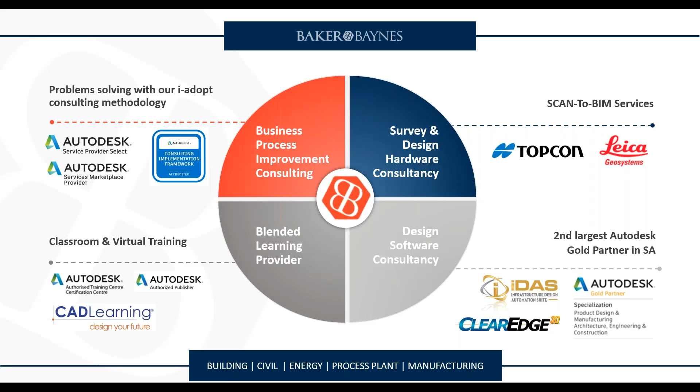I'm going to introduce you to my colleague now, Heilandi Burger, the process plant and manufacturing technical specialist at Baker Baynes. She's quite passionate about the design side as well as manufacturing, holds a mechanical engineering diploma, and has over 10 years of industry experience in the drawing office. She's passionate about data management as well as music, and is a bass guitarist. So without further ado, I'm going to welcome Heilandi Burger, who's going to give us some great insight into the presentation today. Thank you very much.

Thanks, Daneel. A few of our customers told me in the last few months they wish we could meet in person and have a wine and dine like in the past. That would have been nice, but this is at least an alternative where we can still meet and discuss the future with technology.

First of all, I'm going to start off with a poll question. How familiar are you with Baker Baynes and all of our offerings? I'll give about a minute. Just answer for me: you're not familiar with us at all, you're somewhat familiar, or you've been a client for years and know everything about Baker Baynes and what we've got to offer.

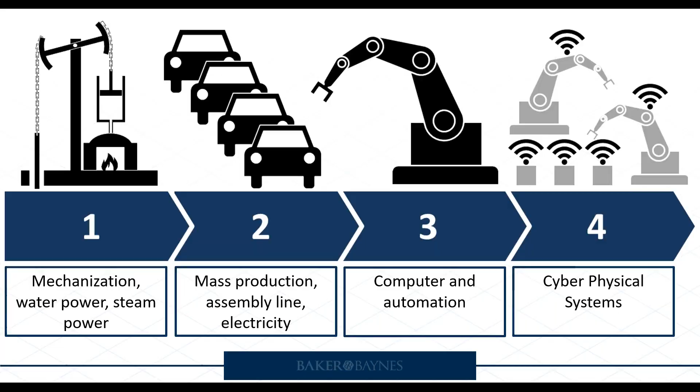Before the first Industrial Revolution, most industrial work was done manually or aided with animals. The first Industrial Revolution started in the 18th century. During this time, manual tasks were replaced by the use of steam engines and other machines. Agriculture and the textile industry benefited the most from the first Industrial Revolution.

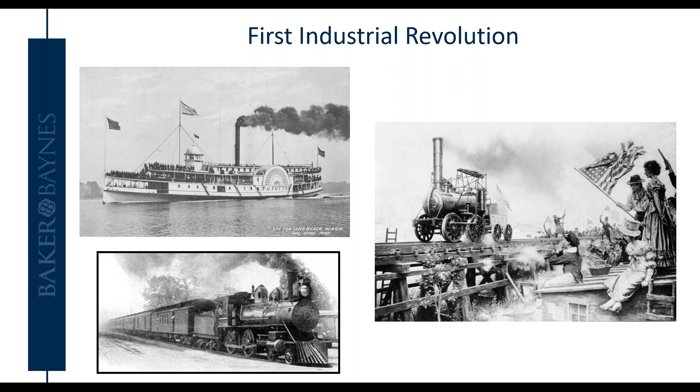The second Industrial Revolution started with the use of steel and electricity inside factories. It started at the end of the 19th century and the early days of the 20th century. During this era, factories were electrified. As a result, productivity increased and mass manufacturing concepts came into the picture. Development of railway networks also enabled the transportation of goods from one place to another faster.

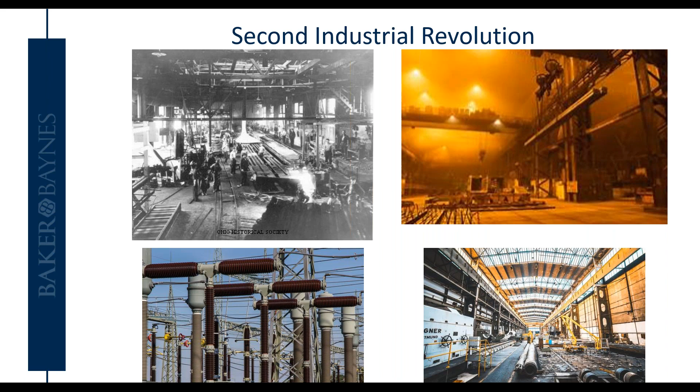So now we are living in the era of the fourth Industrial Revolution, or Industry 4.0. In advanced factories, automated machines and robots are aiding the human workforce to do manufacturing activities. But this is just the start. Industry 4.0 will take manufacturing to a new level by introducing the concept of smart factories, producing smart products using flexible mass manufacturing technologies. Inside smart, fully automated factories, machines will operate independently.

So how does Industry 4.0 work? Cyber physical systems are key for Industry 4.0. Smart factories utilize the Internet of Things to connect smart machines, material, and processes to the Internet. These machines send real-time data to the cloud.

In the cloud, this data is processed using machine learning algorithms. Processed data is sent back to the smart machine, where a modern control system controls the machines and robots to manufacture parts automatically. In this way, high productivity can be achieved without having any impact on product quality. The ultimate goal of smart factories, or Industry 4.0, is to manufacture products without human intervention.

The World Economic Forum estimated that by 2020, more than 50 billion things, ranging from cranes to coffee machines, will be connected to the Internet. Now, 2020 was last year already. Just think about it, 50 billion things connected to the Internet.

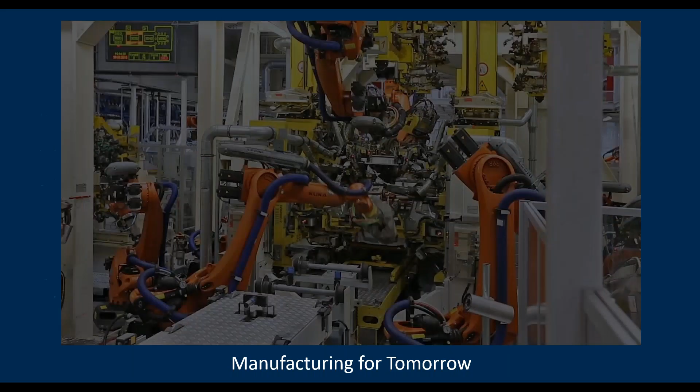So products become assets that can be connected to the Internet, which means they can be remotely monitored. This can help companies better understand how assets are used, predict when they need maintenance, and sharpen total cost of ownership models. By knowing what faults can be avoided or their impact minimized, and with a better understanding of risk and financial exposure, companies can establish service-based contracts with service-level agreements based on reliable data.

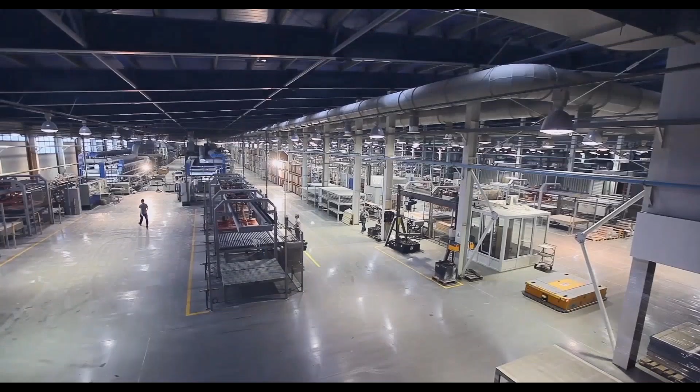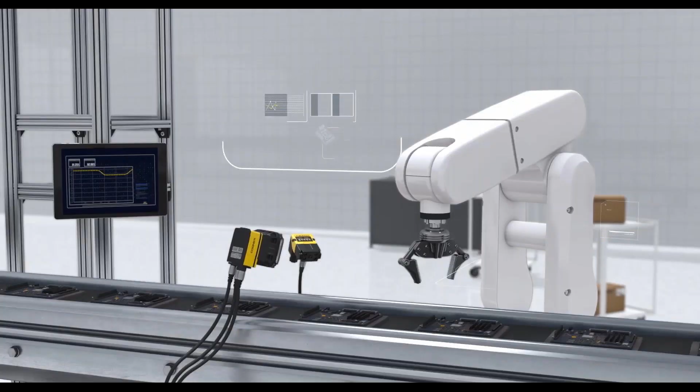What will the manufacturing of tomorrow look like? Industrial parts are becoming smaller. Products get to market with less waste, faster, and on time. Even the most manual processes are turning towards automation. Innovations in machine vision, deep learning, and robotics are revolutionizing production lines and supply chains.

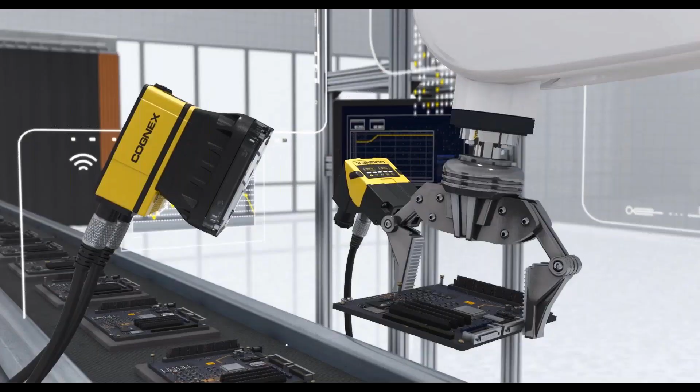Our machines now produce vast amounts of big data accessible via the cloud. As machines and the information they produce become linked, new cyber-physical systems will spark a modern-day industrial revolution. This is Industry 4.0. In Industry 4.0, smart machines learn from their environments and take corrective actions to optimize production. These machines work independently of a central controller, collaborating and communicating with other devices.

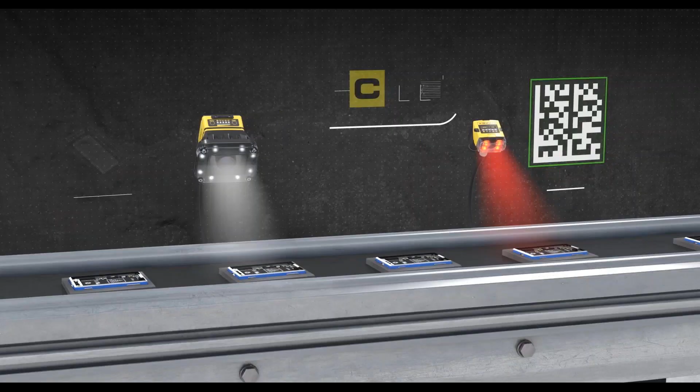Industry 4.0 factories produce new organizational intelligence, which spreads across facilities and is accessible anywhere. The result: nothing short of total transformation of production lines and business performance. Machine vision will be at the heart of this new manufacturing paradigm.

Industry 4.0 signifies the promise of a new industrial revolution, one that marries advanced production and operations techniques with smart digital technology to create a digital enterprise that would not only be interconnected and autonomous, but could communicate, analyze, and use data to drive further intelligence back in the physical world. It represents the ways in which smart connected technology would become embedded within organizations, people, and assets, and is marked by the emergence of capabilities such as robotics, analytics, artificial intelligence and cognitive technologies, nanotechnology, quantum computing, wearables, the Internet of Things, additive manufacturing, and advanced materials.

While its roots are in manufacturing, Industry 4.0 is about more than simply production. Smart connected technologies can transform how parts and products are designed, made, used, and maintained. They can also transform organizations themselves, how they make sense of information and act upon it to achieve operational excellence, and continually improve the consumer or partner experience. In short, Industry 4.0 is ushering in a digital reality that may alter the rules of production, operations, workforce, and even society.

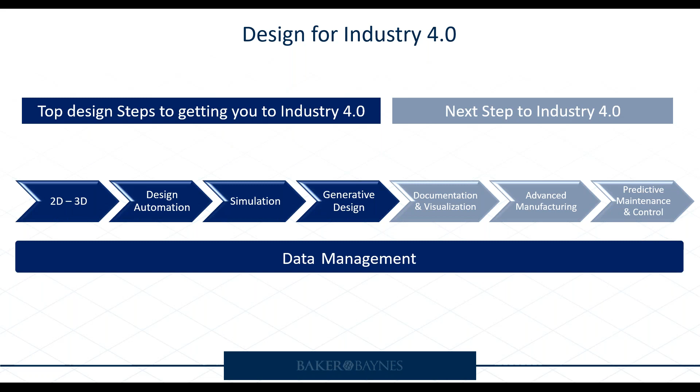Data management will always be part of any of the steps that you take to become better as a company. And we will keep that underlying in every webinar that we have and every event we've got. We will keep talking about it because it's really, really important to all of us.

So the four steps we're going to introduce for the next few months: 2D to 3D, as already discussed, design automation, simulation, generative design, and then the foundation, data management.

We already started with changing, updating, or redesigning your 2D to 3D designs, and we will talk about this a bit later with one of our customers who are currently going through this process.

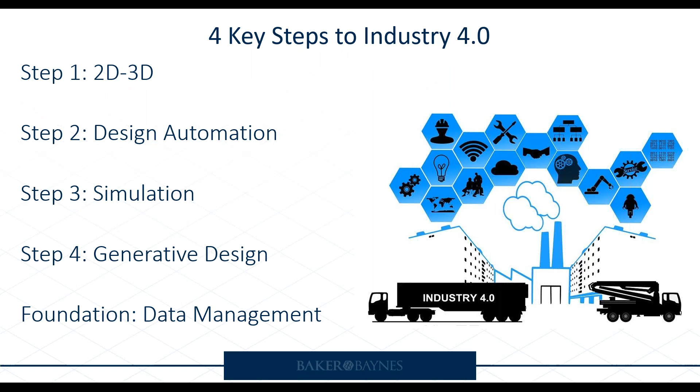So data management, from step 1 until infinity. Why do we need this? Well, because this is the problem we've all built.

Data is all over, in different departments, in different file formats that get sent around. How many emails do you get in a day? And how many of them have an attachment? Something that you have to go in and look at.

Every company is like this, with processes that need to be improved. This is what we are finding. The flow of information never stops, and there's always data somewhere. Data takes different forms. Sometimes it's a file, sometimes it transcends a file and is something else.

When you have a design in a variety of CAD applications, there's only really one good place for it, and that is a PDM system. At Autodesk, we call that Vault.

Vault data management comes with a variety of different Autodesk products, like Inventor Standalone and the Product Design and Manufacturing Collection. If you use these tools, you already have Vault Basic. There are other flavors of Vault, such as Vault Professional, and we'll discuss it a bit later.

Vault is there, it centralizes your data, and it is the place to find up-to-date information. In short, if it's not in Vault, what are you even doing with it? Where are you saving it?

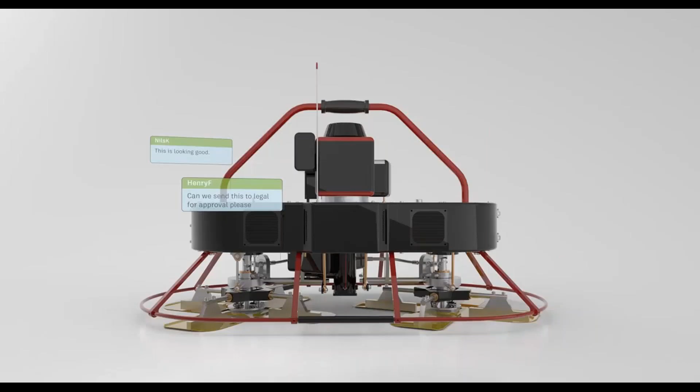And of course, no company will be able to perform optimally if their data management is a mess. With Vault, we can rectify that. You can just look at this short video.

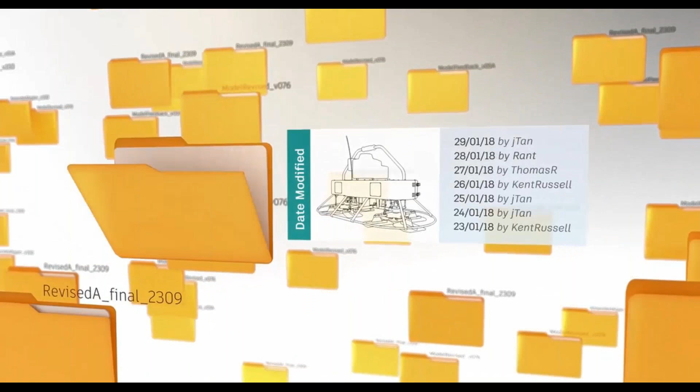Sometimes it's not the project holding you back, it's everything else. It's searching through disorganized files. It's opening a file only to find it's been overwritten by someone else. It's chasing down signatures or change orders. Working with cumbersome spreadsheets. Designing takes a lot of work that has nothing to do with designing. So how can we cut through the chaos and get back to the real work?

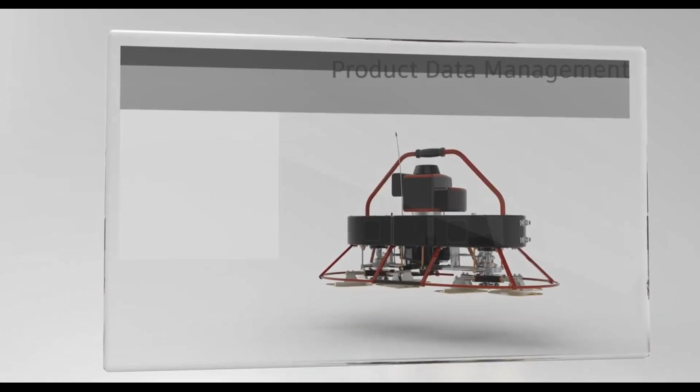Vault is a product data management solution designed just for engineers. It directly integrates with your CAD environment, so you can find what you need quickly, access and configure files easily, and prevent scrap and rework.

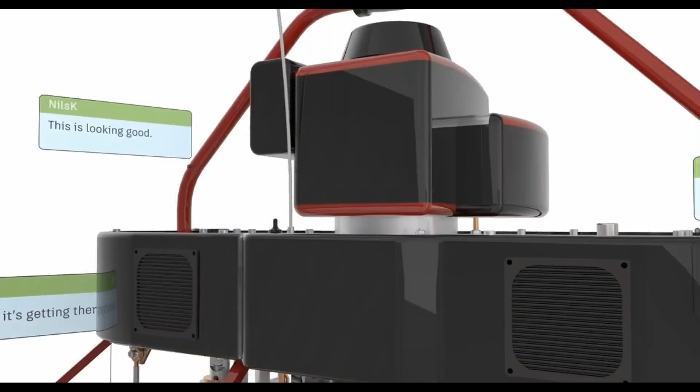But it's more than CAD file management. It allows you to share views with others. It streamlines communication, versioning, and organization. In short, it equips engineers to work and collaborate more efficiently, which helps you deliver better products faster and at lower cost.

Autodesk Vault has a product family. It's a stack of products, and each offering has incremental functionality over the previous product. While Autodesk Vault Basic is included with many Autodesk design applications, additional functionality is available based on your needs. The following products are part of the Autodesk Vault family.

You can have Vault Basic. With Vault Basic, you can do basic file management. You have a single workgroup, fast searching, Autodesk CAD integrations, and design reuse tools.

With Vault Workgroup, you will have file revision control and lifecycles, utilities for batch plotting, automatic file naming, a standalone client for non-CAD users, file and folder security, reporting, and server-based DWF publishing.

With Vault Professional, you will get all the functionality of Vault Basic plus Vault Workgroup. On top of that, custom objects, multi-site replication, a search, view, and print web client, advanced backup and Windows authentication, bill of materials management, engineering change management, and it coexists with enterprise business systems.

Just a reminder, Vault comes in about 40 different applications. That means in CAD we can check in, check out, log in, log out, undo checkout, and with some of the other tools and with Vault Professional, we can actually change the lifecycle states, categorize, and run reports on a vaulted item right from inside the CAD tool. So it runs inside of CAD.

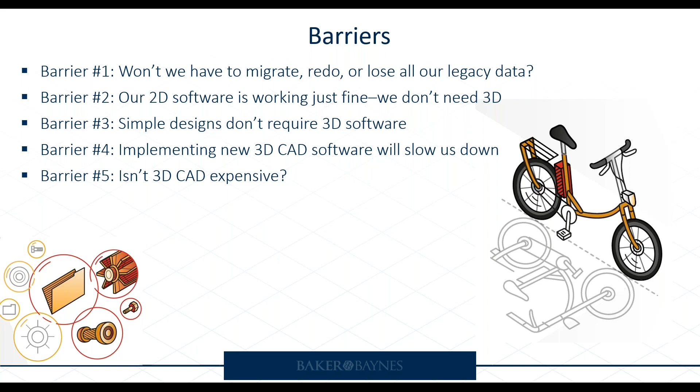Number 5: isn't 3D CAD expensive? The cost of 3D CAD will be returned over and over again through efficiency gains, reduced waste, improvement of product quality, and the value that you offer to your customers.

In the next video, you will see how a part that's drawn in 2D is used to update an assembly in Inventor to 3D. For years, designers have been taking advantage of the layout capabilities of 2D tools such as AutoCAD.

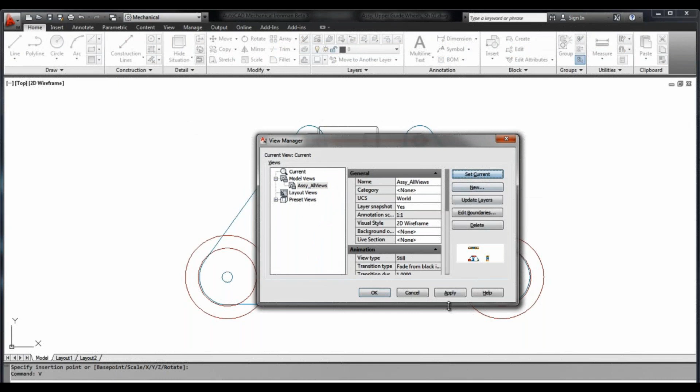Here we see a fairly standard 2D orthographic drawing layout. Autodesk Product Design Suite extends the usefulness of these drawings by allowing users to import selected elements directly into Inventor sketches and leverage existing 2D documentation, thus simplifying the creation of the 3D design.

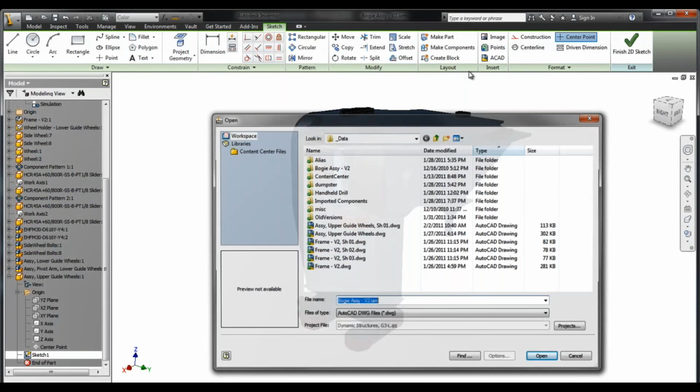To utilize this 2D AutoCAD drawing in the Inventor sketch environment, select the ACAD command from the Insert commands on the Sketch tab. From the Open dialog box, select the AutoCAD file to use as an Inventor sketch.

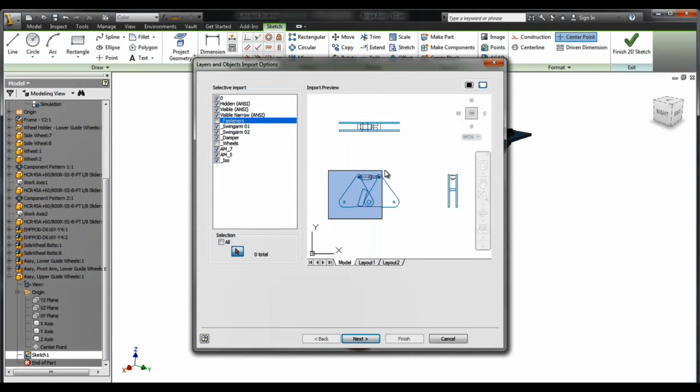This opens the Layers and Objects Import Options dialog box, where you will select specific entities that will be used as sketch geometry. From here, layers may be enabled and disabled, and options regarding the configuration of those entities to be placed in the Inventor sketch, such as default units, disposition of constraints, and blocks, are set.

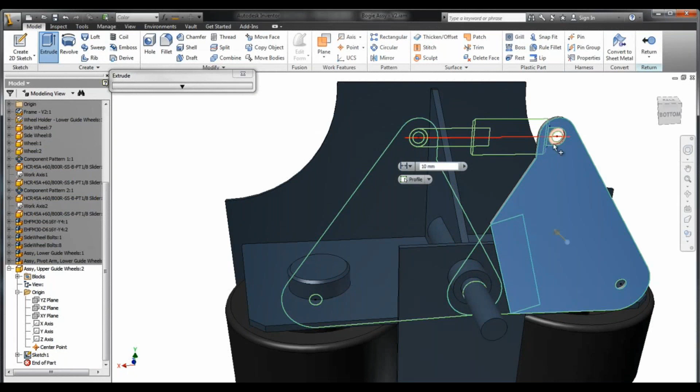After this geometry is placed on the active sketch plane, it may need to be positioned relative to the current sketch origin, depending on values contained in the original AutoCAD drawing. From this point forward, this sketch geometry will behave like all other sketch geometry. Regions within the sketch may be selected and used for extrusions, revolves, etc.

Inventor's new mini toolbar facilitates the setting of properties for this new extrusion feature. In this example, multi-body part modeling techniques are employed to facilitate the design of a weldment assembly within a single part, utilizing a single sketch.

Okay, so next up, we're going to discuss a little bit of design automation. Design automation enables you to capture and reuse engineering knowledge and intent. Automation not only helps reduce errors and time spent on tedious, repetitive modeling tasks, but it can also be scaled to streamline downstream development processes. Design automation can mature from automating basic parameters to full-scale product configuration. Setup can be as simple or as complex as your current needs demand.

We can show you how iLogic technology found in Autodesk Inventor enables engineers to easily utilize rule-based design without complex coding.

Sheet metal parts and welded frames often include standard features that require simple yet tedious modeling. Eliminate busy work by automating the creation of typical product features. Manually modifying models to meet customer specs can drain engineering resources. Define parameters to create your 3D model and easily set rules to drive a custom product configurator.

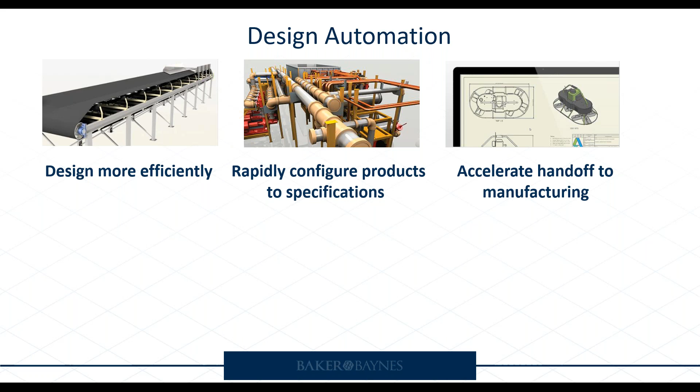Extend your automation beyond engineering with simple-to-code tools that capture and execute standard processes for the creation of drawings, toolpaths, and other documentation. Let's look at how design automation saves you time and gives you back the reason for becoming a designer in the first place.

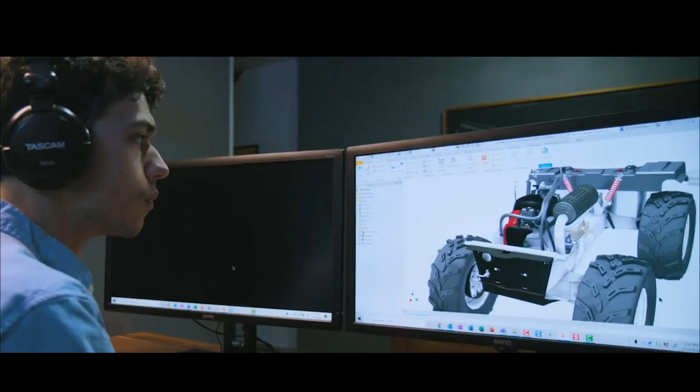What was it that inspired you to become an engineer? Was it solving complex problems or bringing new designs to life? Now compare that to how you actually spend most of your time. How do we deal with all those routine tasks that interrupt us when they too must get done?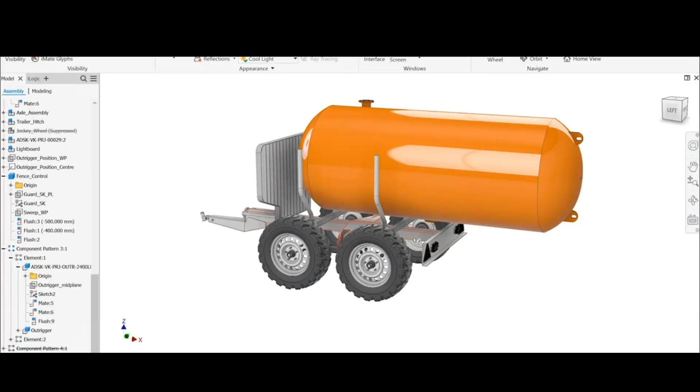Your factory floor uses automation. Why not bring a little bit of that into the engineering offices?

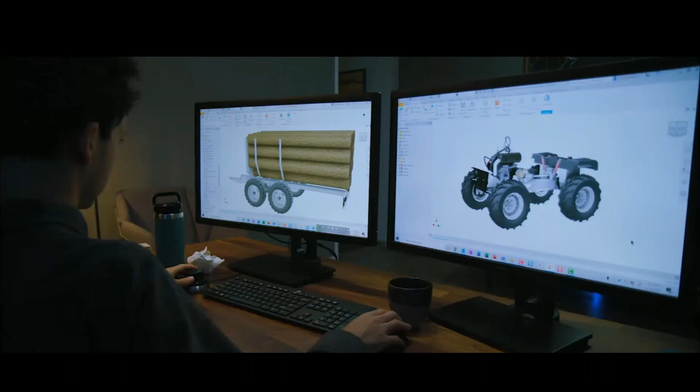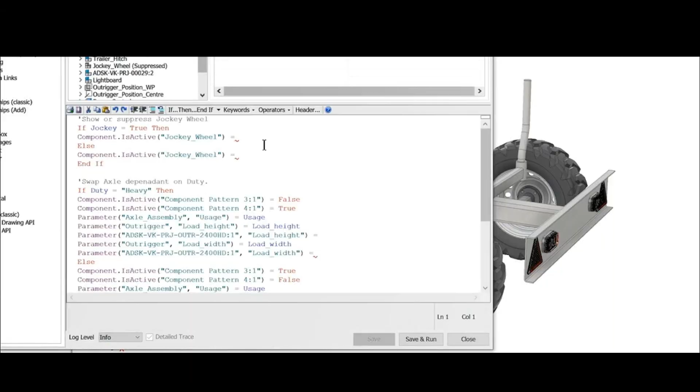With iLogic technology, design automation saves you time by reusing engineering knowledge and intent within your CAD software. We created iLogic technology for use inside Autodesk Inventor. There are no expensive third-party add-ons. It's all included. Using parameters that you've defined in your model and a vast library of code snippets, you can create rules intuitively.

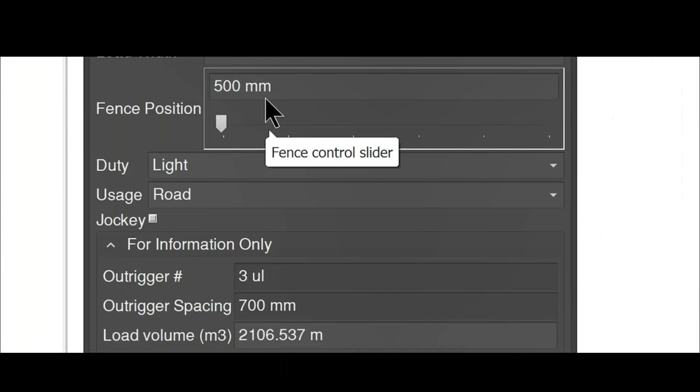So that next time you need a design generated, just input the parameters and the work is done for you. It's that simple.

To model an impeller manually took a couple of days previously. With the iLogic program, it takes about 15 minutes. If we're modeling hundreds of impellers a year, to create this program is absolutely worth it.

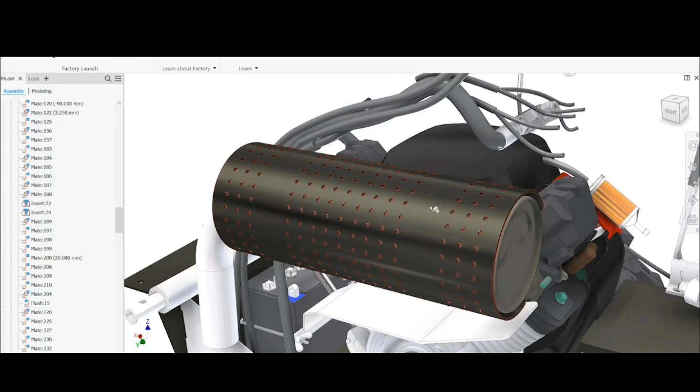Inventor automation technology is versatile enough to address your specific processes and ultimately free up your time to focus on creating what's next. Design automation with iLogic—it's all within Autodesk Inventor.

Okay, we're almost at the end of our industry journey. Simulation. Manufacturing simulation is the computer-based modeling of a real production system. Simulation allows organizations in the manufacturing industry to analyze and experiment with their processes in a virtual setting, reducing the time and cost requirements associated with physical testing.

Unsurprisingly then, running a high-functioning production line can be quite a challenge. Businesses are constantly adjusting their manufacturing schedules to fulfill ambitious quality, cost, delivery, and flexibility goals. The wrong move can result in major supply chain disruption. So it's essential to have the right support.

So with simulation, it will help you to get shorter production cycles, faster data entry times, alleviate work in progress, reduce lead times. There's more customer satisfaction, accurate sequence planning, better quality products, fewer admin tasks, and empowered leaders. Picking the right manufacturing process software is key.

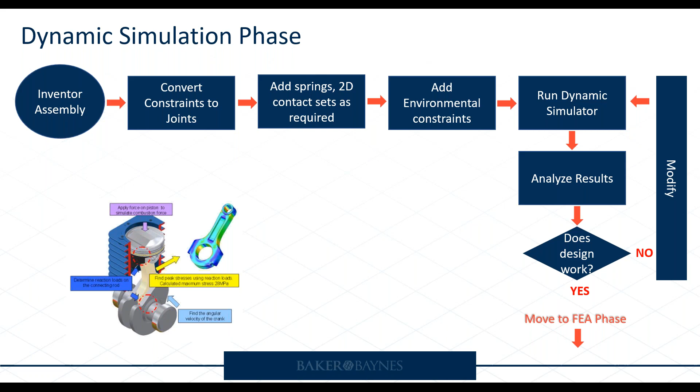So with the dynamic simulation phase complete, you will transfer your reaction loads to FEA. You will run a FEA analysis, analyze the results, and ask the question, is stress within the limits? If no, you need to modify and go all the way back to run the dynamic simulator again and start the process downward. It sounds a little bit tedious, but once you get used to it, it is actually going very fast and very quickly.

And by the end, you ask yourself the question again, is stress within the limits? And it's yes, your analysis is complete and you know that you've got a quality product.

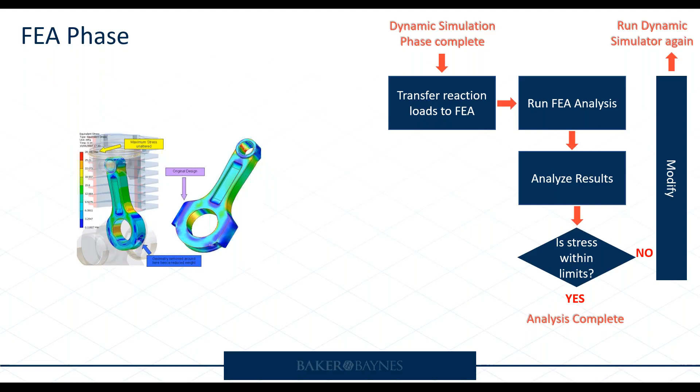So Autodesk Inventor Simulation Suite addresses the shortcomings of traditional, dedicated FEA and motion analysis solutions by providing easy-to-use tools that work directly with Inventor 3D model. The resulting ease of use gives designers a true digital prototype that can be used to experiment with different design options.

At the same time, it can increase confidence that the performance of the final design will meet the customer's expectations. The ability to predict and transfer reaction forces to the stress analysis environment allows designers to leverage the digital prototype to optimize part geometry while reducing the need to build costly physical prototypes.

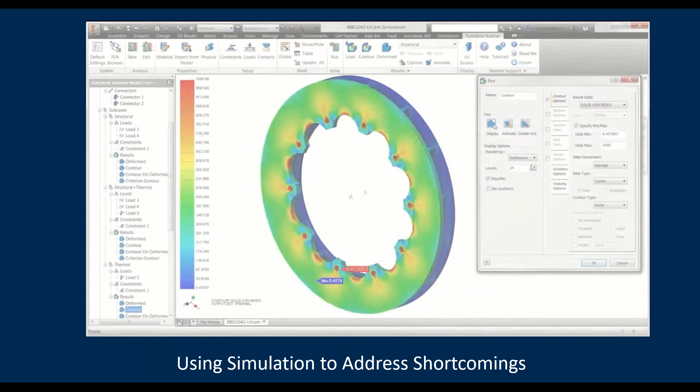So simulation has become an essential tool that every engineer can now use. That is because when you use simulation, you can evaluate decisions as you make them, create more opportunity, like improve performance and reduce the likelihood of failure.

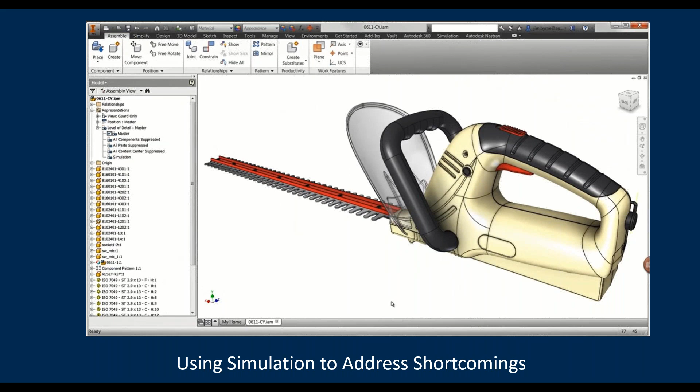With the PDM collection, you have access to a wide range of simulation tools, including nonlinear, thermal, fatigue, vibration analysis, right inside of your software. Linear analysis is helpful, as often included, but it is limited to static loads and a material model that is only appropriate for metal. On the other hand, nonlinear studies eliminate several limitations.

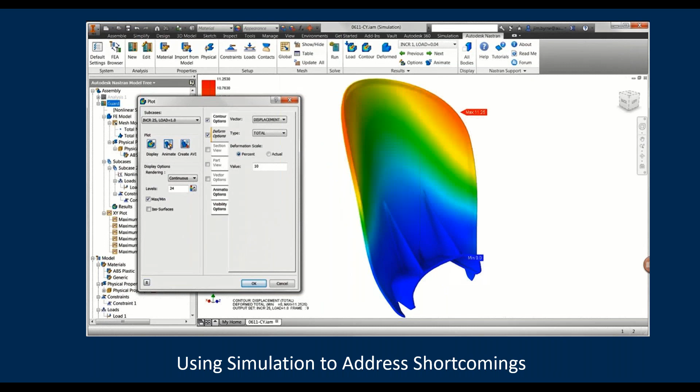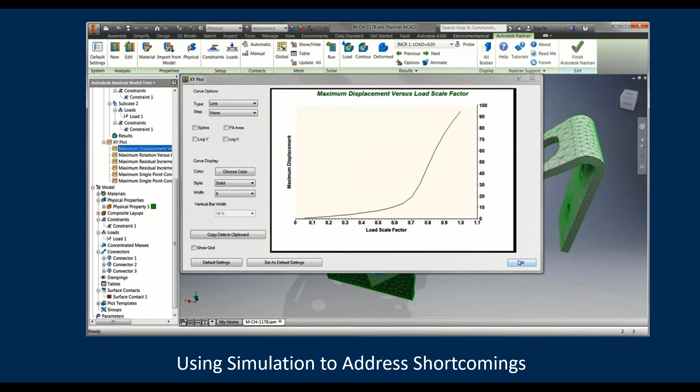They provide advanced material models specific for plastic, rubber, or foam. Choosing the appropriate material is essential to determine accurate results. Determining the stress and deflection gives insight to design integrity, but does not tell the entire story. Is it possible that your design may buckle at some point as the load is applied? This can only be checked by running a linear or non-linear buckling study type.

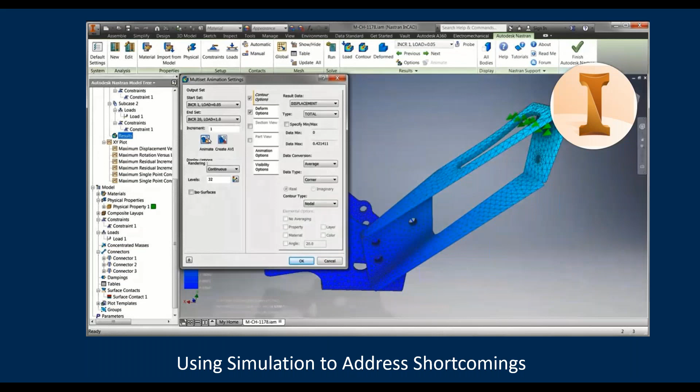And if there's issues, adjustments can be made based on the results from the solution. And remember, the study types you have set up can simply be run again the moment your model has been updated, all in one interface. The tools included in the PDM collection help you to gain valuable feedback in your design decisions early in the process, giving you more opportunities to reduce cost and validate performance.

The fourth step we would like to discuss is one that a lot of people find very exciting, but are also a bit scared of because they don't really know the extent of this tool. It's generative design: an interactive design process involving a program that generates outputs meeting certain constraints, and a designer that fine-tunes the feasible region by selecting specific outputs or changing input values, ranges, and distribution. The designer doesn't need to be human - it can be a test program in a testing environment or an artificial intelligence, for example a generative adversarial network. The designer learns to refine the program, usually involving algorithms, with each iteration, as design goals become better defined over time.

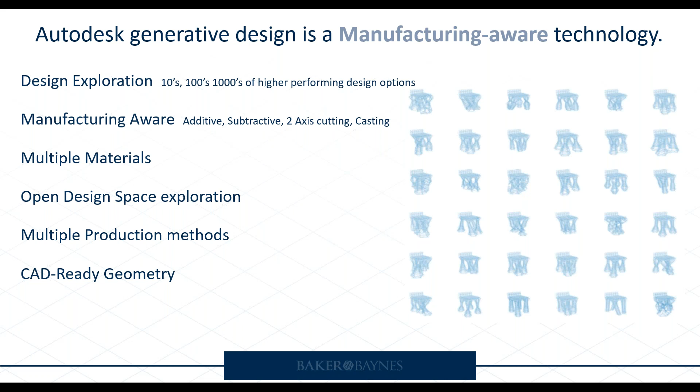Autodesk Inventor is a great tool for most types of mechanical design. However, sometimes you need a creative spark to come up with an innovative solution with a significantly different shape, characteristics, or weight. In this case, generative design technology can be used as part of your existing workflow and inspire ideas that are difficult or even impossible to get otherwise. Using artificial intelligence software and the computing power of the cloud, generative design enables engineers to create thousands of design options by simply defining their design problem with basic parameters such as height, weight, what it must support, strength, and material options. As with any new technology, there's often confusion and a lack of clarity around what exactly the technology is and what it isn't.

Engineering teams are constantly under pressure to get products to market in less time. I'm going to show you now, once again, a little video of what generative design is and how it can help you to make your life better.

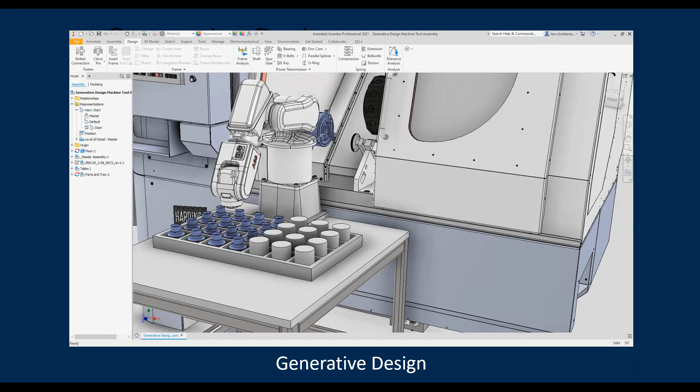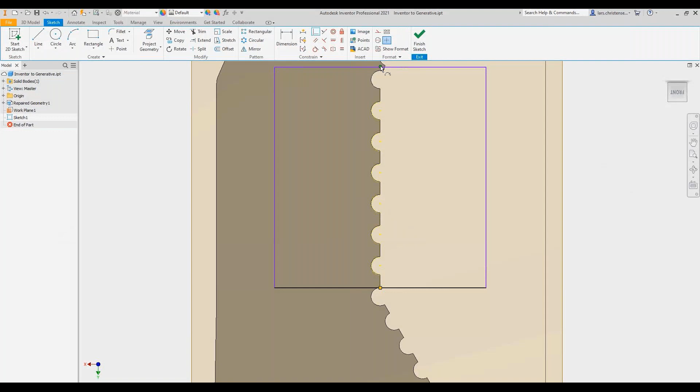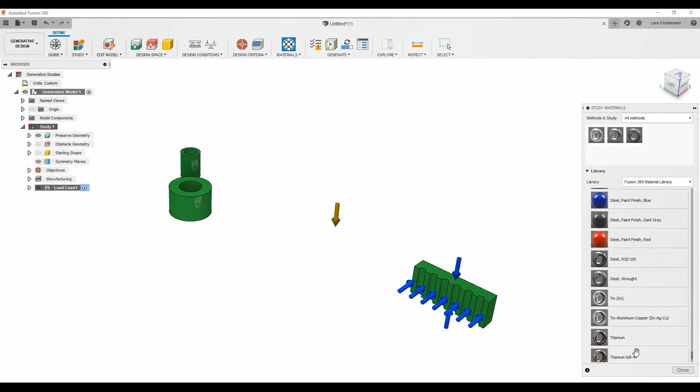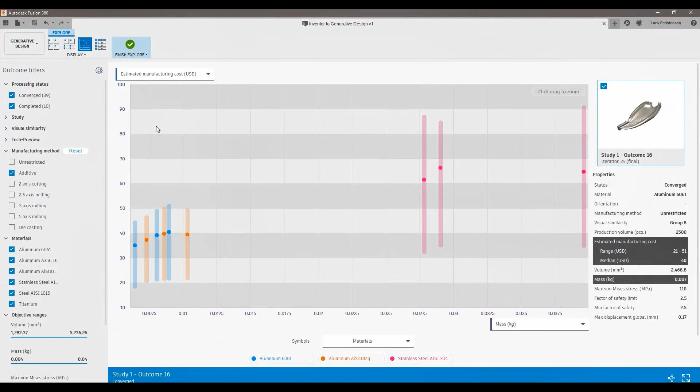The pressure to get products to market in less time is limiting the ability of engineers. Using the PDM collection, in addition to your traditional design tools like Inventor, can help you develop better products and elevate your business without adding an innovation lab to your department. Generative design in Fusion 360 is a new way to solve engineering challenges more efficiently. With Fusion 360 and Inventor, both part of the PDM collection, you have traditional CAD tools, but you are also able to explore the power of cloud computing, keeping down the price of expensive computer equipment by speeding up processing time. This helps your engineers choose the best design from multiple pre-validated concept models faster with less cost. Generative design in Fusion 360 generates design alternatives. Design engineers input goals along with parameters such as performance, materials, and manufacturing methods. The software provides multiple outcomes, pre-validated against loads, constraints, materials, and manufacturing processes. Engineers are no longer limited by their imagination, training, or previous experience, but are empowered to make trade-off decisions for materials, cost, and manufacturing methods. All of this happens in less time than your team can currently develop and evaluate one or two alternatives. Gain a competitive advantage with Inventor and generative design as part of the PDM collection. Empower your team to optimize and deliver high-performing design alternatives that traditional design development couldn't provide.

So we've got a poll question, and we would like to know which one of the four steps in Industry 4.0 you think you fall under. Will it be 2D to 3D design, simulation, automation, or generative design?

See, the answers are coming in quite nicely. I will give it a couple more seconds before we close the poll. Thanks, Daneel. Okay, I think it's safe to close the poll. I'm going to share the results with you now. Interesting results there, Heilandi. Yes, Daneel. Okay, back to you. Thanks.

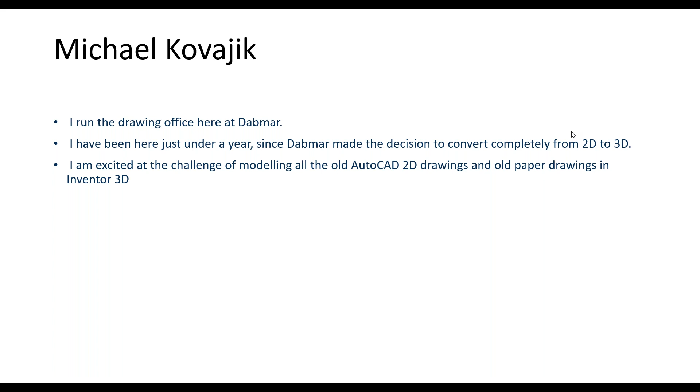Okay, sorry about that. As Daneel has introduced me, my name is Mike. I run the drawing office here at Dabmar. I've been here just under a year since Dabmar made the decision to convert completely from 2D to 3D. And I'm excited at the challenge of modeling all the old AutoCAD 2D drawings and old paper drawings into Inventor 3D.

Dabmar Manufacturing Company is an established manufacturer of screening machines and has been in the bulk materials handling and processing space for about 55 years. Our factory is located in Hattingspruit, KZN, but we have a global reach, with our equipment installed in over 16 countries. We design, build, test and manufacture our screens and products in-house, and are proud that the vast majority of our screen components are manufactured right here in Hattingspruit.

We still have our original drawing office and drawing boards at Dabmar. Dabmar began its exploration into 2D CAD in the late 80s, early 90s. We immediately saw the value and advantages of a computer-based system. As technology developed globally, we dived in where possible. When 3D drafting became practical and accessible for the consumer market, we again saw the advantages of drafting our products in that environment. The ability to interact with your products in a virtual 3D world means we can accurately design and develop new ideas and modifications in a fraction of the time.

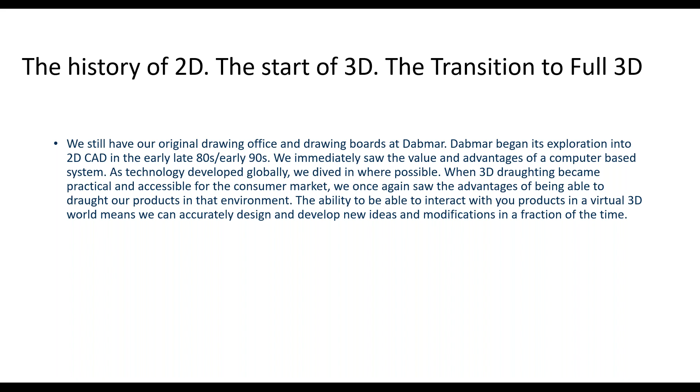What is 2D? 2D, as most of you will know, is two-dimensional drawing. The drawing is only done using two axes, the X and the Y axes. Every single entity drawn has coordinates in the X and Y axis only; the Z coordinate is always 0. It is literally like drawing on a flat piece of paper. You cannot rotate it around multiple axes like you can in 3D; you can only rotate it about the Z axis.

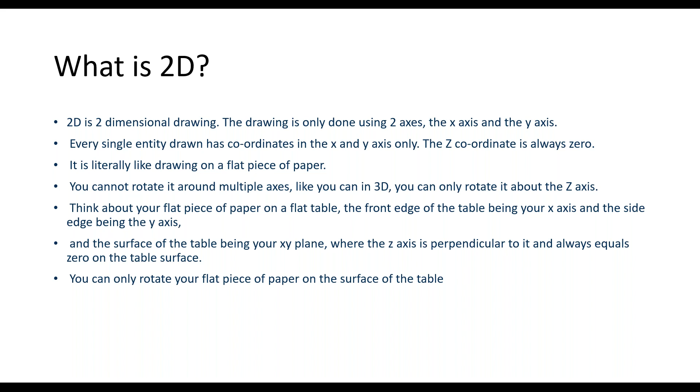Think about a flat piece of paper on a flat table: the front edge of the table is your X axis, the side edge is the Y axis, and the surface of the table is your XY plane, where the Z axis is perpendicular to it and always equals 0 on the table surface. You can only rotate your flat piece of paper on the surface of the table.

What is 3D? 3D is three-dimensional drawing. This is no longer called drawing as such, it is called modeling, and is done using all three axes, the x-axis, the y-axis, and the z-axis. Every single entity modeled has coordinates in all three of those axes.

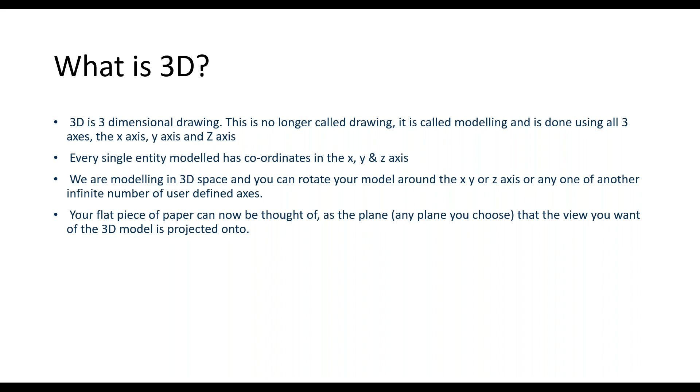We are modeling in 3D space, and you can rotate your model around the x, y, or z axis, or any one of an infinite number of user-defined axes. Your flat piece of paper can now be thought of as the plane, any plane you choose, that the view you want of the 3D model is projected onto.

Advantages of 3D over 2D. Once you have finished modeling your object, you can automatically project any view you want and automatically show it with or without hidden lines. You don't have to draw and work out how each and every view looks like you do in 2D.

Not only can you generate any view you want, you can generate any section through any part of your object. You can generate any 3D view you want from any angle, either an orthographic projection with parallel sides, or a perspective projection, with sides joining up at a single point far in the distance.

Once you have finished the model, you can automatically generate the mass as long as the correct material properties, i.e. density, are current for that model.

Once the model is complete, you can send it to a 3D printer to have a look and feel what it's actually going to be like in reality once it is manufactured.

Once the model is complete, you can do a stress analysis on it to see where it might fail and where the most highly stressed areas are going to be.

The factory personnel using the drawings to do the manufacturing understand the drawings a whole lot better with the additional 3D views, and this has already proved to be the case with the new 3D drawings we have issued. There's far better understanding of the drawing, fewer grey areas, less chance of mistakes, and far fewer questions back to the drawing office.

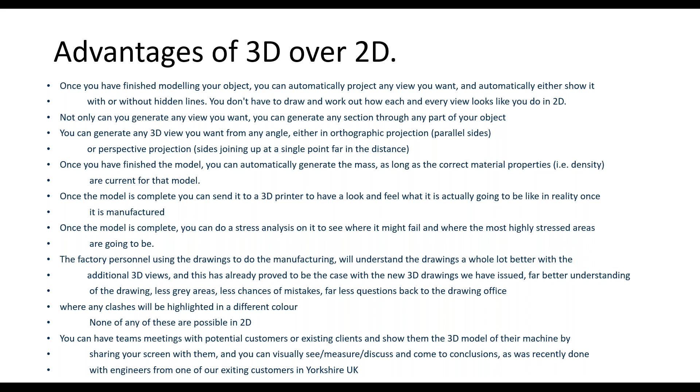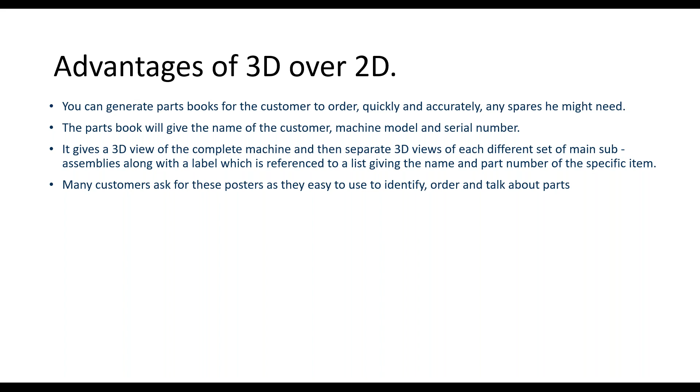You can generate parts books for customers to order quickly and accurately any spares he might need. The parts book gives the name of the customer, machine model, and serial number. It gives a 3D view of the complete machine and then separate 3D views of each different set of main sub-assemblies, along with a label referencing a list giving the name and part number of the specific item. Many customers ask for these as they are easy to use to identify, order, and talk about parts.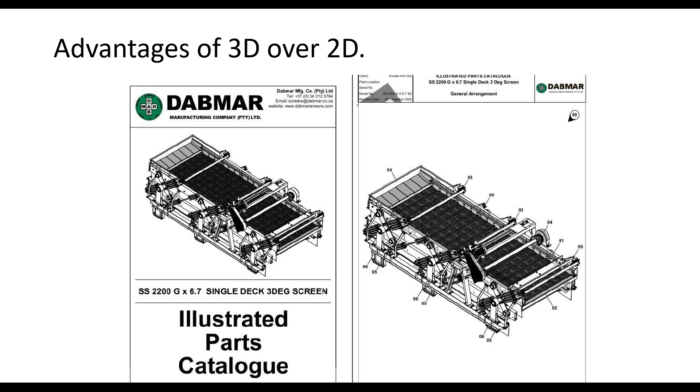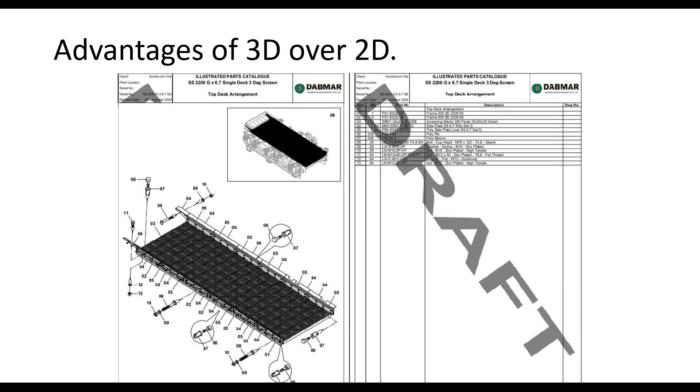And there's an example of one of our illustrated parts catalogs for one of our customers. Here's an example of the sub-assemblies with the parts shown, making it very easy for the customer to see what's in his machine and what to order.

You can generate parts posters for customer quick reference, as we have done for a lot of our customers. Here is a poster we did for one of our customers, labeling all the major parts with their generic names for use in discussion. That poster is a lot easier to use than a parts book for general discussion with a customer.

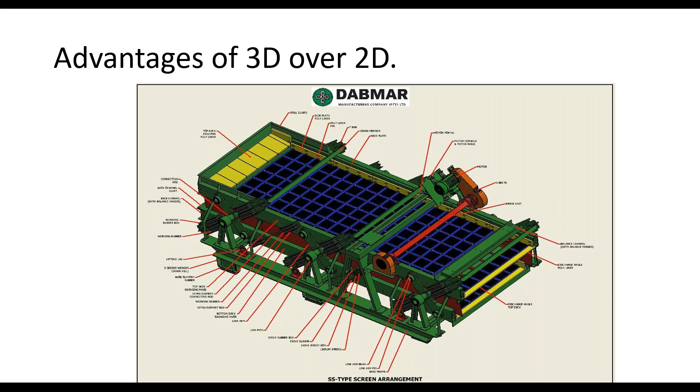You can even do videos from exploded assemblies to show how the machine goes together, or even how specific important sub-assemblies go together, using the Inventor IPN function, which allows you to export to video format.

Vault data management advantages. Vault enables you to check into a central cloud or local-based database on a regular basis, so that all the drawings and relevant info is easily accessible to all involved, wherever they might be physically located. Vault is very secure, and the administrator can set permissions as to who can access what, in cases where certain people only need to see certain information or drawings.

The version history enables you to keep track of exactly what each person has done to each drawing, and also enables you to revert back to old versions whenever required. Vault, with its strict rules and the ability for you to set certain rules, forces you to be very structured and very tidy in the way you save, file, retrieve, and share your drawings and info.

Okay Mike, thank you for that great insight into Dabmar and how you do it. But I just have a couple of questions.

So with regards to your transition from 2D to 3D, I know you mentioned that there was quite a bit of 2D work and some small transitions being made. However, looking at it, how has that impacted Dabmar itself with time saving, or has there been any time saving with that?